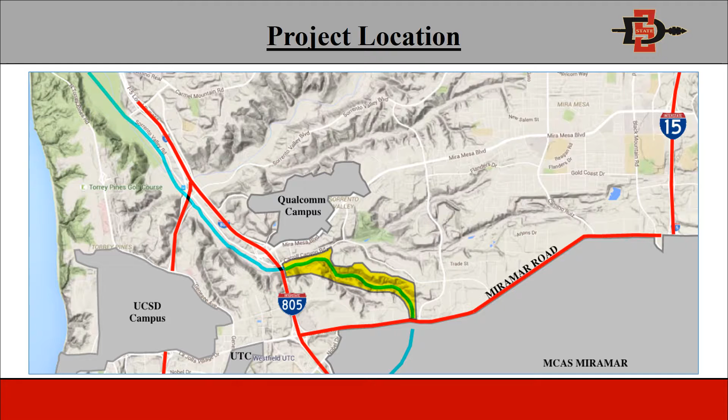Our project is located in San Diego, just east of the Golden Triangle, north of MCAS Miramar Military Base, and south of Qualcomm Campus. It services the San Diego area and allows for transportation of freight and passengers. The stakeholders on this project consist of Amtrak, North County Transit District, the Department of Transportation, SANDAG, and Metrolink.

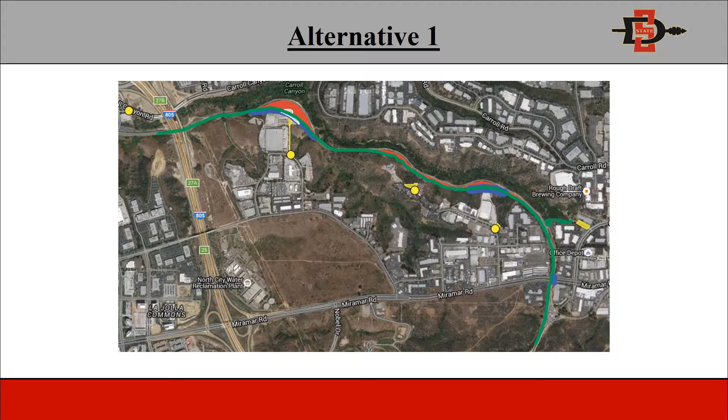Our project includes the analysis of two alternatives. Here we see alternative 1. The first of our alternatives is alignment 1, which is located on the south side of Carroll Canyon, just east of the I-805. This alignment lies along the current existing alignment. In order for these two alignments to run side by side, 700,000 cubic yards of soil must be cut.

Due to these cuts, the soil at 3 locations becomes unstable and soil nail walls must be constructed to keep the soil from collapsing onto the tracks. If these conditions are met, the train can achieve a maximum velocity of 45 miles per hour for freight and passenger cars.

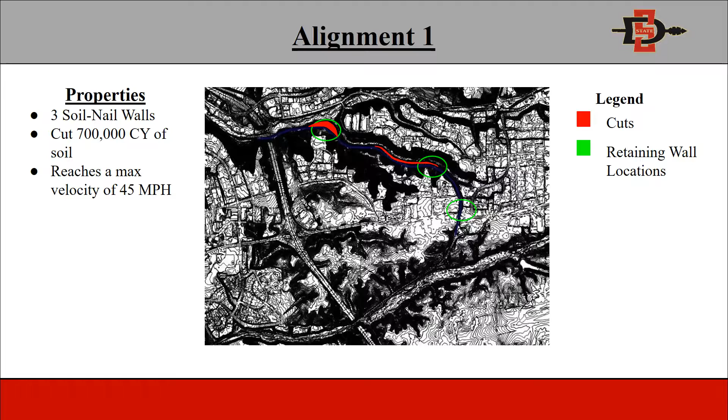Earthwork is a major component of this project. In alignment number 1, there are two major cuts. Cut number 1 is right below the FedEx distribution center and it starts at station 25 and ends at station 39.5. The maximum depth of this cut is 153 feet. Cut number 2 is further down east and starts at station 80.5. It ends at station 85.5.

There will be other cuts along the cliff walls of the current alignment in order to flatten the curves. This way the train speeds will be increased. We will be sloping the cuts back at a 1-to-1 ratio. In this slide, we show a typical cross-section of one of our major cuts in the soil.

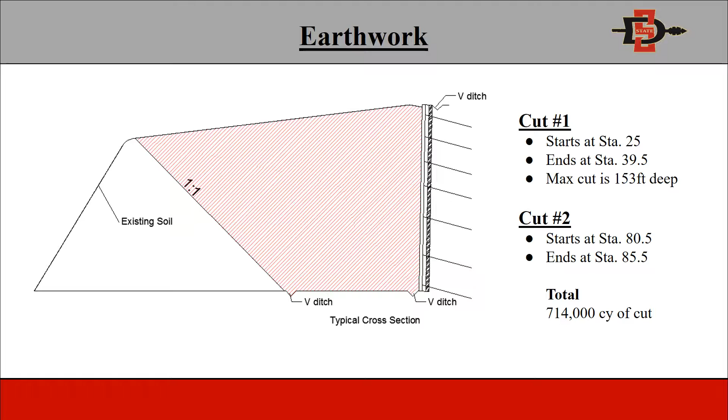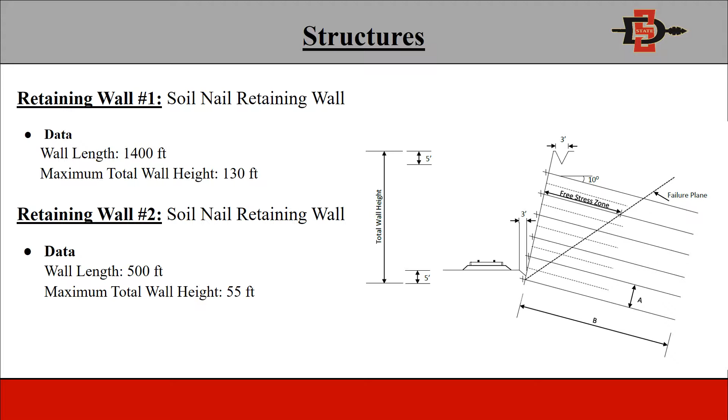Alignment 1 requires the construction of two soil retaining walls. Both of these walls will be soil nail walls. Wall number 1 has a length of 1,400 feet and a maximum height of 130 feet. The second wall has a length of 500 feet and a wall height of 55 feet.

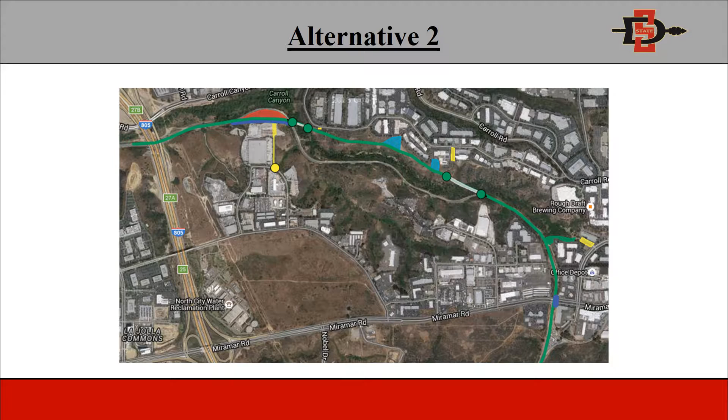Alternative 2 has some distinct features as well. The distinct features on Alternative 2 include a soil nail wall, 2 bridges, and some fill. Along with 350,000 cubic yards of soil excavated, alignment 2 will require 2 retaining walls, 2 steel bridges that will allow the train to cross the canyon, 48 piles, and 6 culverts. This alignment will allow the freight and passenger cars to reach a maximum velocity of 59 miles per hour.

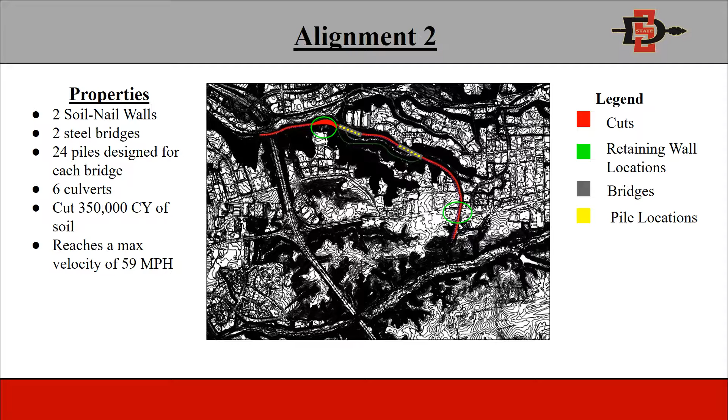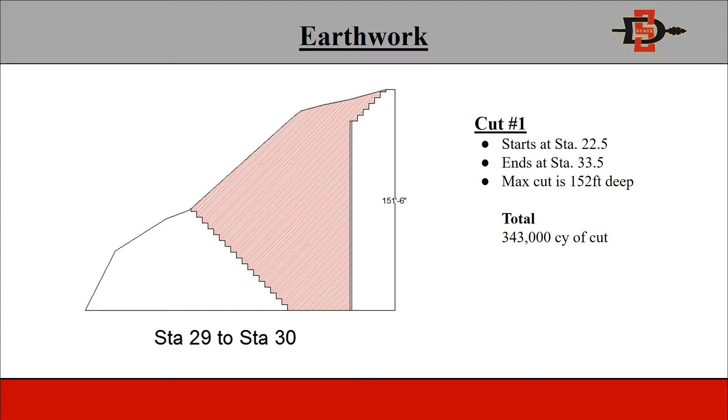Earthwork for alternative number 2 is not as extensive as alternative number 1. There is one major cut that's also right below the FedEx distribution center. It starts at station 22.5 of the alignment and ends at station 33.5. The maximum depth of this cut is 152 feet. We will be sloping back at a 1-to-1 ratio and build a retaining wall whenever we cannot slope back.

Alignment 2 requires the canyon to be crossed twice. For that, 2 bridges need to be designed. Bridge number 1 is a plate girder steel bridge. It begins at point 35.5 and it ends at point 40. The total length is 450 feet.

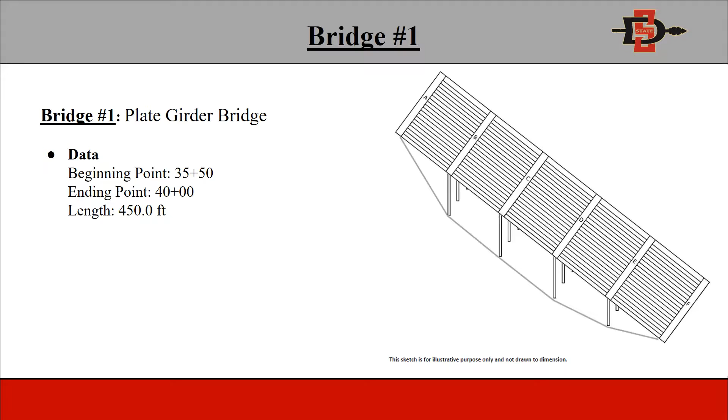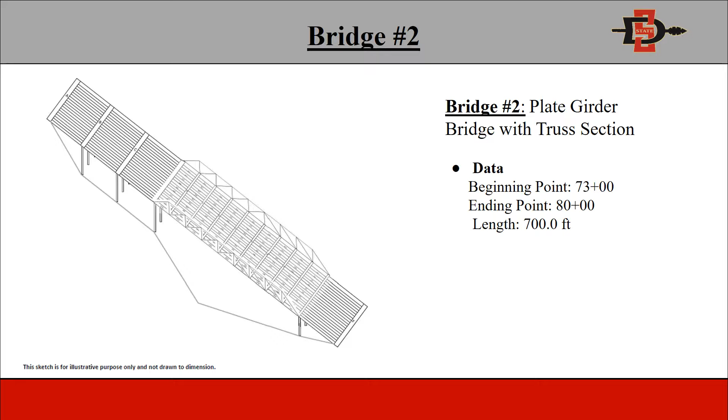Part of this analysis includes an environmental impact study and mitigation plan. Amongst the environmental considerations, we have to think about the natural communities, the biological resources, cultural and paleontological resources, the greenhouse gas emissions, and the overall aesthetics and visualizations.

Amongst the natural communities, we have wetlands and uplands. Primarily affecting the area are the wetlands. These include the riparian woodland and the vernal pools. These provide food, cover, water, and nesting areas for wildlife. They also control erosion and sedimentation. Amongst the plant species, we have the coastal sage scrub and the maritime chaparral. These are both home to the endangered California gnatcatcher.

As well as the plant and animal species, we have cultural resources. These include a number of artifacts that were left over from the Native Americans, such as a cobble foundation. As well, due to the larger amounts of soil removed, there are a number of volatile organic compounds that were released into the atmosphere.

Comparing Alternative 1 against Alternative 2, we see that the overall project impacts of Alternative 2 are higher than Alternative 1. Even though the soil removal of Alternative 1 is about 700,000 cubic yards, unlike Alternative 2, which is about 350,000 cubic yards, Alternative 2 ultimately impacts more cultural sites and more nesting grounds than Alternative 1.

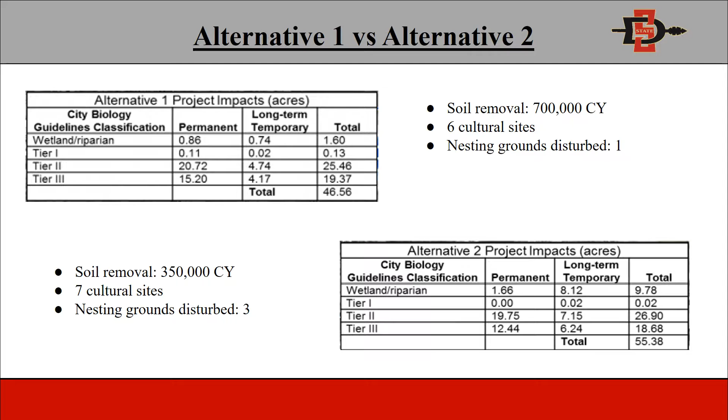Our project included a cost estimation process. This process took into consideration these main points: the right-of-way acquisitions and property easements, site civil earthwork, track work, signal modifications, new structures such as the soil nail walls, structural excavation, structural backfill, bridges, new culverts and drainage, site mitigation

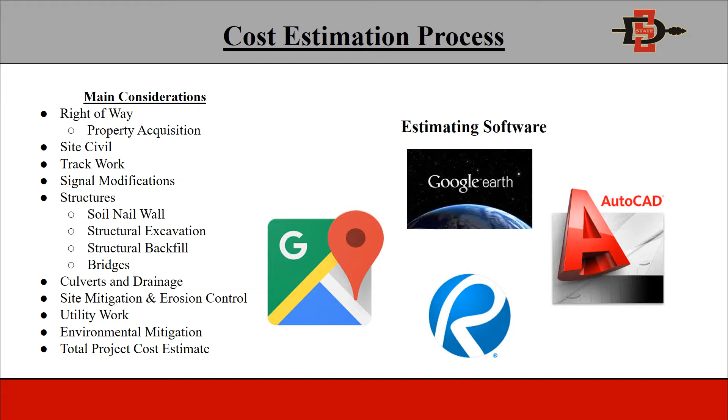and erosion control plans, utility work, and environmental mitigation. All of these items together produce the total project cost, which helped us to determine the best alternative. The software that we used on this project included Google Earth, AutoCAD, Bluebeam, and Google Maps.

In conclusion, the advantages of Alternative 2 outweigh Alternative 1 in that Alternative 2 is the faster alignment. It requires less soil export of 430,000 cubic yards. It has a lower total project cost of about 15% less. It is aesthetically pleasing with 2 new bridges.

It causes less interruption to active transportation networks during construction. It includes a shorter construction schedule with lower cost of construction to the owner. And a unique feature of Alternative 2 is that it has the potential for a future transit station that would serve the Qualcomm complex.